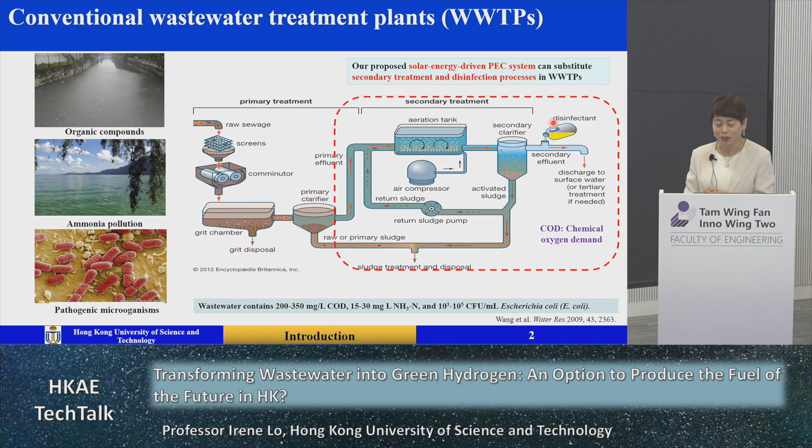Now, for this kind of treatment, although we have used it for so many years, it still has many limitations—at least these three limitations have been reported elsewhere. The first one is the presence of pharmaceutical and personal care products, in short form we say PPCP.

You might not know that every day we often use antibiotics because medical doctors give prescriptions to buy antibiotics if you get sick. But then in our wastewater, we often find the presence of these antibiotics—we call them emergent pollutants—in certain concentrations. The conventional wastewater treatment is not designed to treat or remove these kinds of antibiotics, so they are often present in our treated wastewater without any removal.

The second problem is that wastewater treatment involves high carbon emission, because using conventional wastewater treatment we generate nitrous oxide, N2O, and also methane gas, which are greenhouse gases with global warming potential substantially larger than CO2. So we have to remove these greenhouse gases because nowadays we talk about low carbon emission processes and try to avoid any global warming issue.

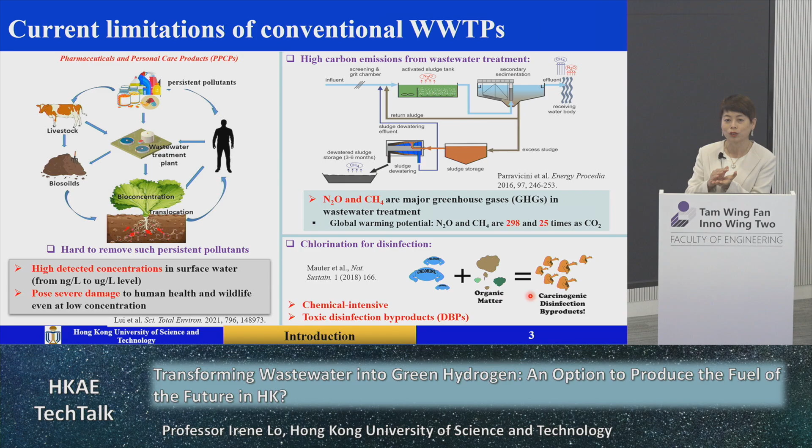The last limitation is that after we treat the wastewater, we use chlorination for disinfection. But chlorination often has problems because after we use chlorine to kill the bacteria, we might produce disinfection byproducts, which are cancer-causing substances. Although we don't see any obvious issue about causing cancer because we regulate the cancer-causing disinfection byproducts to a certain concentration before we discharge to the water body, adding chlorine is also a chemical-intensive process. So this is the current limitation.

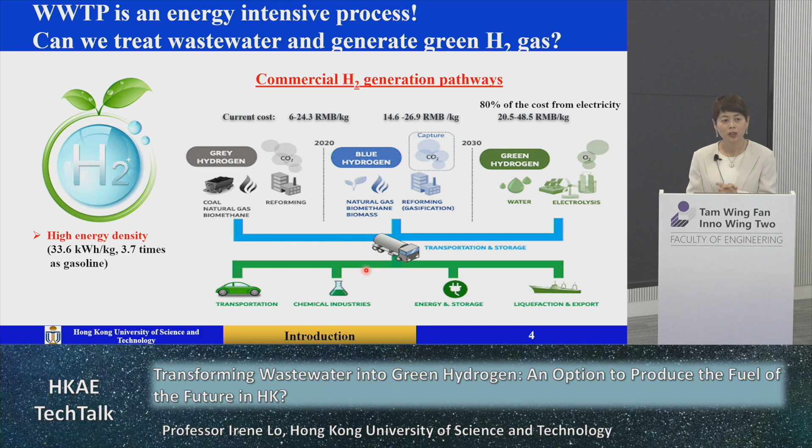Other than this, treating wastewater involves high intensity of energy—we need electricity, we need a lot of energy consumption. But can we ask ourselves, is there any technology where we can treat the wastewater to meet the standard as well as produce energy rather than use energy? Is it possible? That is the question we would like to explore today.

Among the hydrogen energy we want to produce, everybody wants green hydrogen because it is green and not generated from dirty fuel such as coal combustion. If we generate hydrogen from coal, we call this gray hydrogen. But if we use renewable energy to generate the hydrogen, then it is called green hydrogen. However, generating green hydrogen nowadays is expensive—although it is good, nobody really produces this kind of hydrogen because it's expensive.

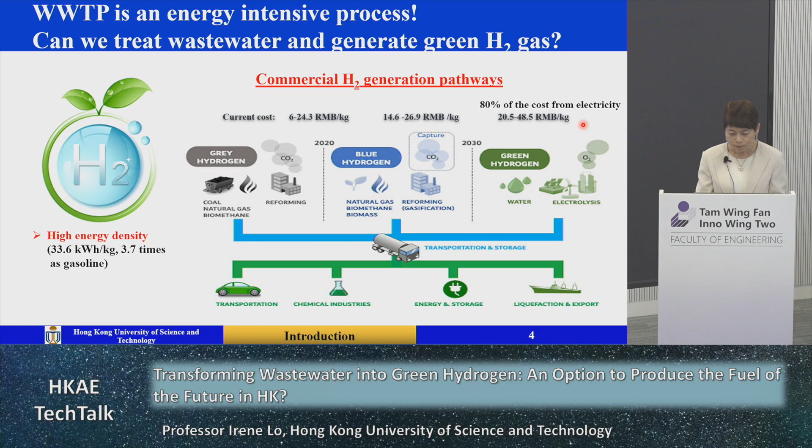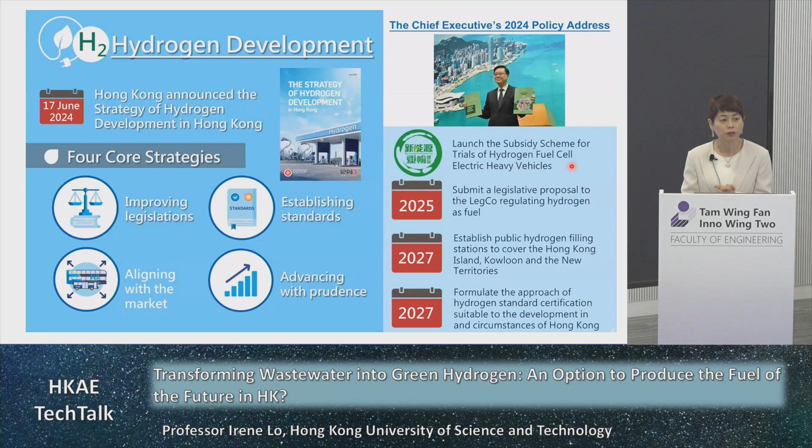In Hong Kong, the government actually has a plan to develop hydrogen. Last year, in 2024, they already had this development plan with 4 core strategies, such as how to improve the legislation for the use of hydrogen, how to set up the standard for hydrogen production. Also, our chief executive, during his policy address last year, particularly mentioned the launch of a subsidy scheme for hydrogen fuel cells for electric heavy vehicles. And there's a roadmap for the development and use of hydrogen in the coming years.

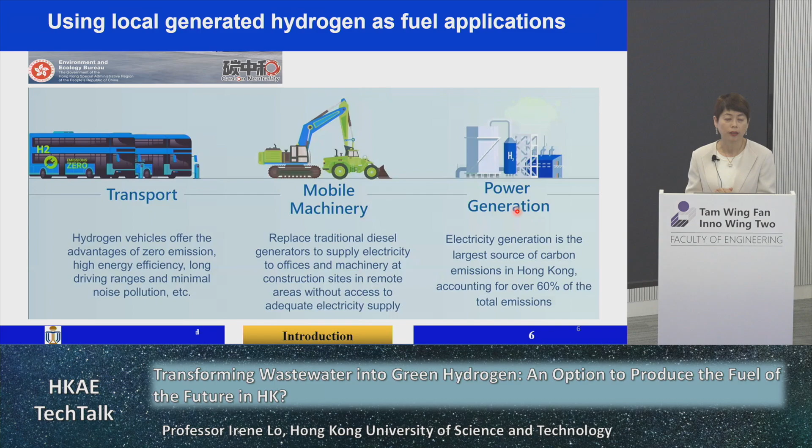You might ask, once we produce and generate hydrogen, in what way can we use it? In Hong Kong, hydrogen can be used for transport with hydrogen vehicles. Hydrogen can also be used for mobile machinery to replace diesel fuel, because diesel is a high carbon emission, dirty fuel. And hydrogen can be turned into electricity for power supply. So there's a number of applications we can consider when we have hydrogen produced locally.

So then the question is, we need to find an innovative technology which can treat our wastewater to meet the treatment standard in Hong Kong, and at the same time produce hydrogen. Among many technologies we considered, we finally decided on the use of PEC, which is a photoelectrochemical process.

In our research group, we have rich experience doing the PEC, or photocatalysis, process over the last 15 years. Every time, we publish a paper using PEC to remove or degrade organic compounds, so for a single function. We also developed materials used for PEC or photocatalysis, such as titanium dioxide in different forms, to inactivate bacteria or kill bacteria. And also we use PEC in another way, to oxidize ammonia nitrogen to nitrogen, to avoid generation of nitrous oxide, which is a greenhouse gas.

And also we know that water splitting can produce hydrogen, so our research group has done this kind of research. Now the difficulty is that we need to find common materials used as photoanode in the PEC technology which can do all these things: remove organic pollutants, inactivate bacteria, remove ammonia nitrogen, and generate hydrogen. Is there any single material that can do so many things together? That is the ultimate objective.

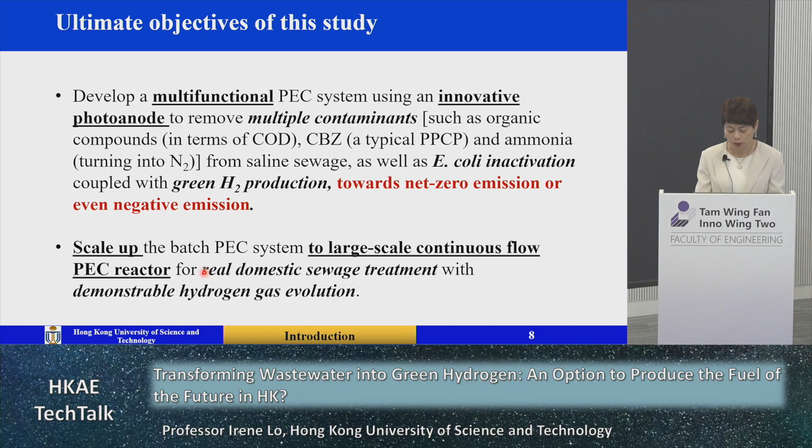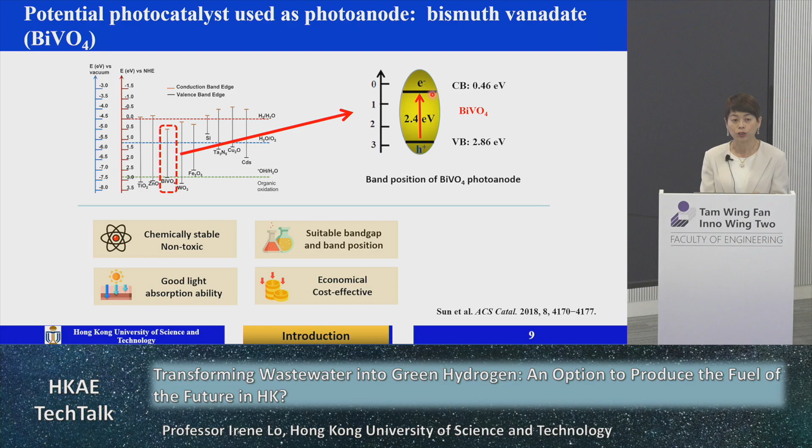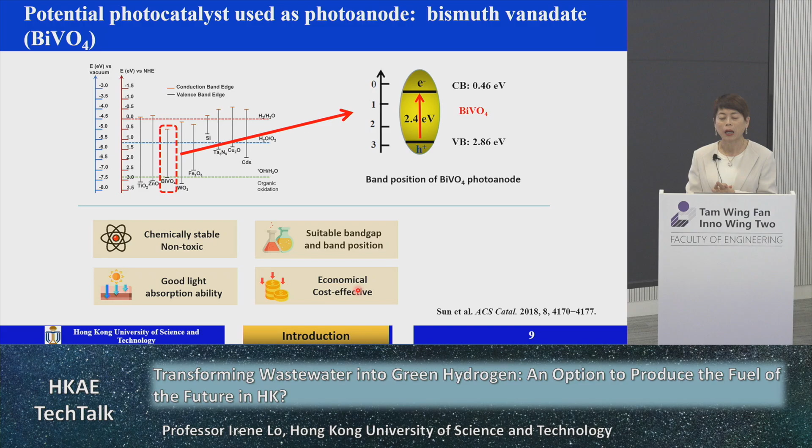Bismuth vanadate was chosen as a starting point for the research because it has several good things. It is chemically stable, a non-toxic material, and it has a very suitable band gap and band position. Band gap means the material has a very good valence band and conduction band, so it might be able to degrade and treat pollutants and also produce hydrogen. It also has a very good capacity to absorb sunlight, and the material itself is economical and cost-effective. So with this background, we think we can start with this material for investigation.

But we know we cannot just use bismuth vanadate directly because it still has some problems. Once it absorbs sunlight, the electron gets excited, but the bad thing is that it more easily goes back to the valence band—we call this charge recombination. Another drawback of this material is that its surface reactivity is not that high.

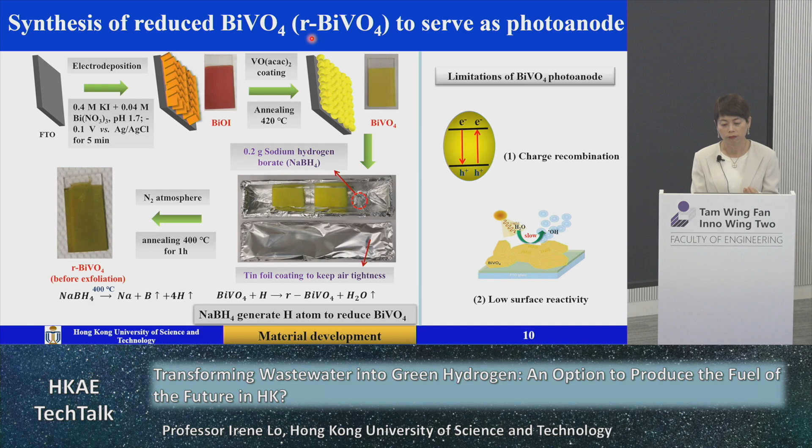So if we want to use this material, we have to do some modification to ensure the charge recombination can be prevented, and also make the surface more reactive than before. This is the modification process to make this bismuth vanadate more reactive. We call this reduced bismuth vanadate, and then use that as the photoanode.

After modification, we check whether the reactivity is stronger than before using XPS spectrum. You can see the V4+ before and after modification, and we have more V4+, meaning the reactivity increases. For the oxygen vacancies, before modification shown in green color, after modification the oxygen vacancies increase, meaning more percentage of oxygen vacancies corresponds to more percentage of V4+.

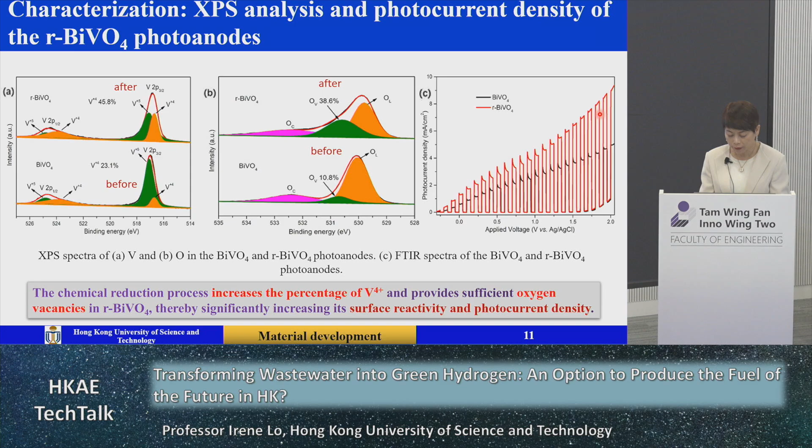More importantly, the more direct result is that we measure the photocurrent, the electron transfer. Without the modification, it's this line in black color. After modification, it becomes the red color, showing higher current flowing through this material. So we think this modification might work, and we can test it.

So then we use the batch study for the photoelectrochemical process. The idea is that we use sunlight to be captured by the photoanode to do the reaction. To mimic the sunlight, we have the solar light simulator. We can adjust the light intensity to mimic daily sunlight intensity, strong and low, depending on the weather. And then we have the reactor, called the photoelectrochemical reactor.

You can see this reactor. We have our material serving as photoanode, and then the cathode, which is the platinum electrode, and the reference electrode. In this reactor we have the water sample, and we take samples from time to time to see the change of the pollutant. We also have the gas sample to see whether we have hydrogen generated.

So we start with this batch study, and do two controls for comparison. For PEC, we have the light illumination, applying light to mimic sunlight, and also applying voltage. Then we have EC, the electrocatalytic process, just the voltage applied without sunlight. And we have the photocatalytic process, just the sunlight without voltage. This allows us to do direct comparison, and then we take water sample and gas sample after treatment.

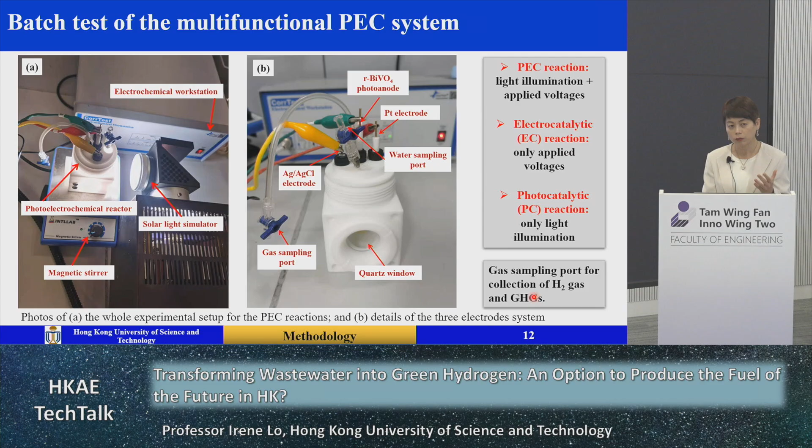So this is our finding. Now, as I said at the beginning, we don't use the real wastewater collected in Hong Kong. We just use simulated water, because we're trying to prepare wastewater that mimics the local wastewater.

Based on the local wastewater, the simulated wastewater has CBZ, which is a PPCP, a kind of emergent pollutant. We also have the equivalent of 300 milligram per liter COD, and 30 milligram per liter ammonia. The bacteria is in terms of CFU, 10 to the power 5 bacteria per mil of wastewater, and the pH of the wastewater is around 7. So we use this kind of simulated wastewater for study to see if it works or not.

Bear in mind, I highlight in red color that in this wastewater we have high chloride concentration, 5,000 milligram per liter. You may ask how come it is so high, but do you know how high the chloride ion is in our Hong Kong wastewater? Very high, because we use seawater for toilet flushing. So our wastewater usually has chloride ion over 5,000 milligram per liter, sometimes 7,000, sometimes 8,000, and occasionally we might have 10,000. So using 5,000 is actually the lowest concentration of chloride.

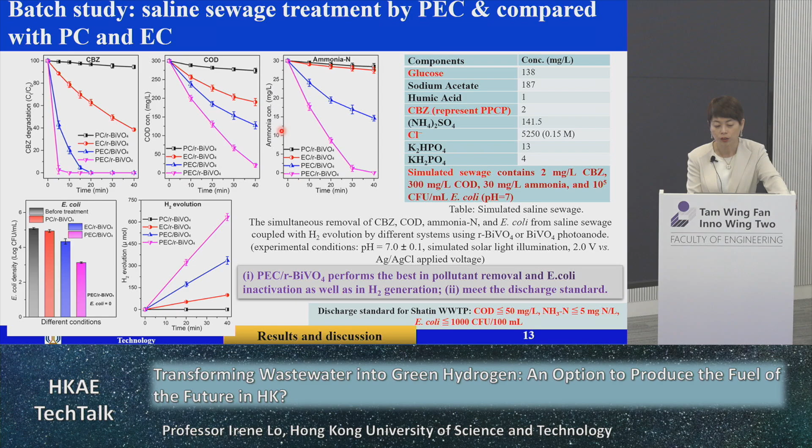Bear in mind that our zero point is slightly above that origin, because you can see the data point. In 5 minutes we can degrade all the CBZ. For the COD, in 40 minutes we can remove it to meet the treatment standard. For ammonia nitrogen, in 30 minutes we already meet the treatment standard.

For the E. coli disinfection, you don't see anything, it is zero because the bar is zero. So just in 5 minutes we can kill all the bacteria. So it's really, really effective.

For the hydrogen we want to generate, you can see that the pink line is our system, and the hydrogen generates as the reaction goes on. So by this kind of system, we can see that we have no problem to meet the treatment standard for the

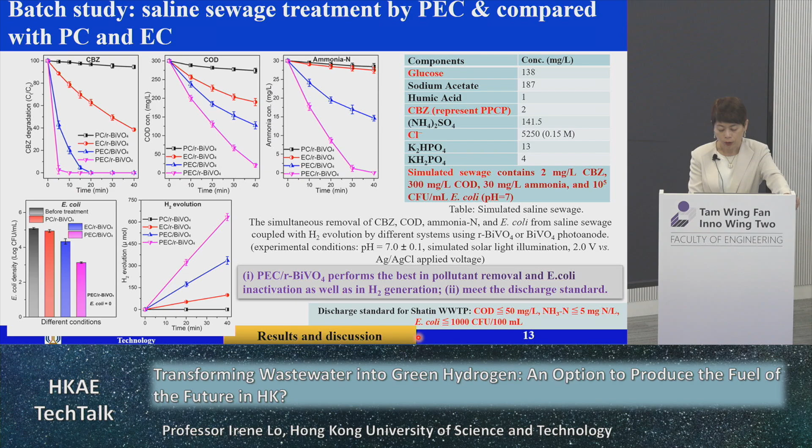Shatin wastewater treatment plant. So then we can continue to see what is the mechanism, how come the reaction is so good, the finding is so good. So then we do some scientific study, and we conduct the scavenger tests to find out what are the reactive species involved in this treatment system.

So basically, it is the photogenerated hole to degrade these pollutants. And then for the hydrogen evolution or generation, it is electron involved, because the water molecule picks up the electron and generates the hydrogen.

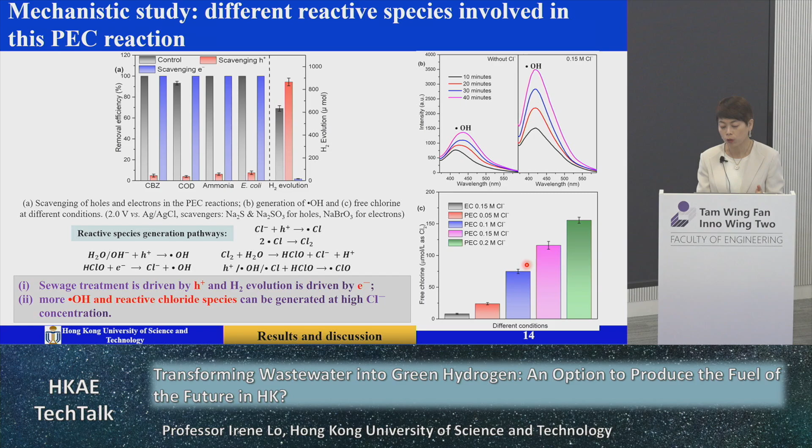Interestingly, when we have more and more chloride ion in the wastewater, as I said, our wastewater has a very high concentration of chloride. More chloride ions give us more hydroxyl radical, which is a very reactive species to oxidize the pollutant. Also, when we have more chloride ion in the wastewater, we have more free chlorine, that is chlorine residuals or chlorine species to react with the pollutants.

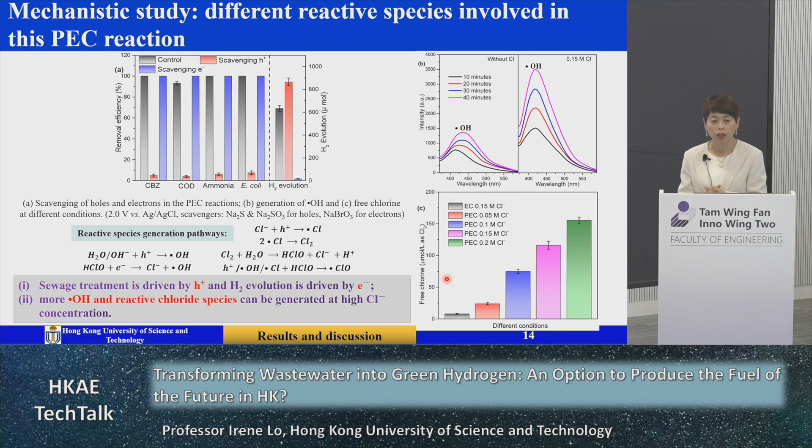So then we further tested what radicals are involved. To remove these pollutants and kill bacteria, we found out that it is the chlorine radicals that are the dominant species involved in the removal of the pollutants, followed by the oxychlorine radicals and hydroxyl radicals.

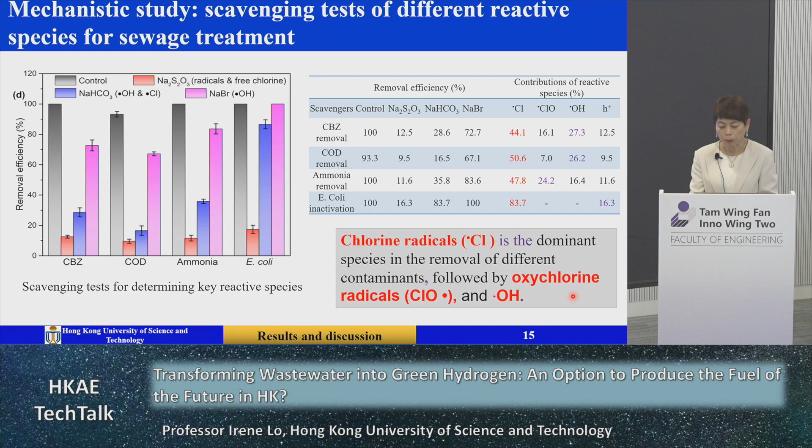So in summary, for the mechanism part, we truly understand what is going on for this treatment. For organic pollutants such as PPCP, COD, BOD removal, it is the chlorine residual and hydroxyl radical involved. For ammonia nitrogen, it is the residual chlorine, chlorine radicals, and also oxychlorine radicals involved. But it doesn't produce N2O, it mainly produces nitrogen gas, N2.

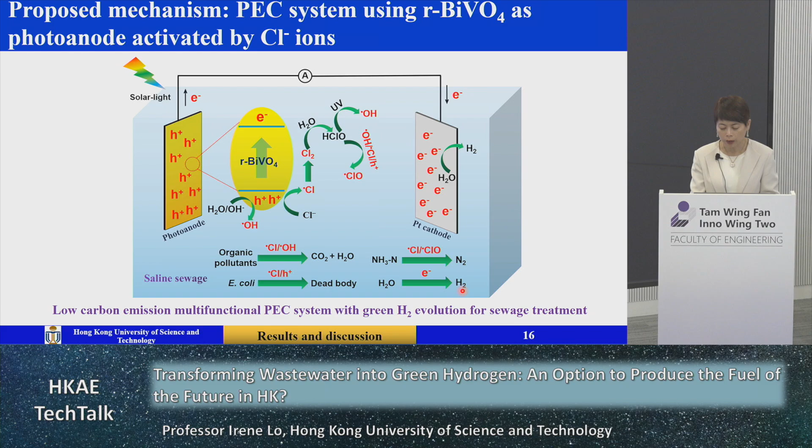For E. coli disinfection, in a short time we can kill all the bacteria. For the hydrogen generation, on the cathode we generate the hydrogen, and it is electron involved. So understanding the mechanism, we can apply the real wastewater to see whether it works rather than

the simulated water. So we collected 2 wastewaters from local treatment plants, one is Shatin, the other is Stonecutters. You can see the color is still different because in Shatin it is biological treatment, in Stonecutters it is chemical enhanced treatment.

So we measured the wastewater quality before treatment, and compared it with our simulated sewage used previously. You can see that for the chloride ions, Shatin has much higher chloride ion concentration than Stonecutters, and even higher than the concentration we used in the simulated sewage.

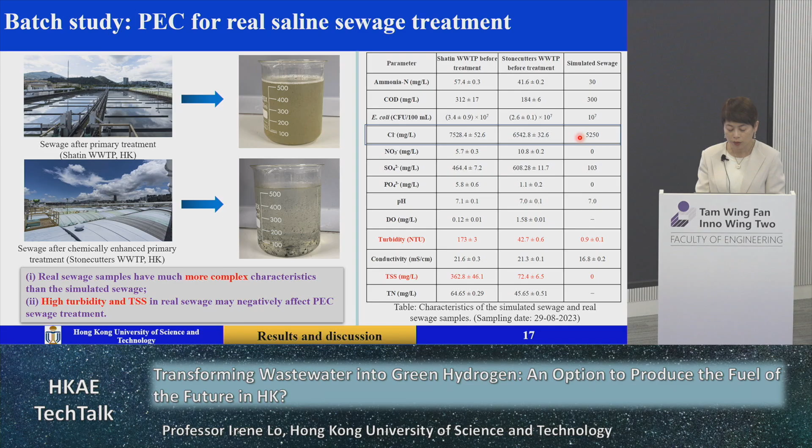So we tested this real wastewater, and after our PEC technology, you can see the picture. That is from Shatin, and after treatment it is very clear. This is from Stonecutters, after treatment you can see that the treated wastewater is much more transparent.

We measured all those parameters and concentrations, and we have no problem meeting the treatment standard. So we meet the discharge standard, and basically we can discharge to the water body without problem.

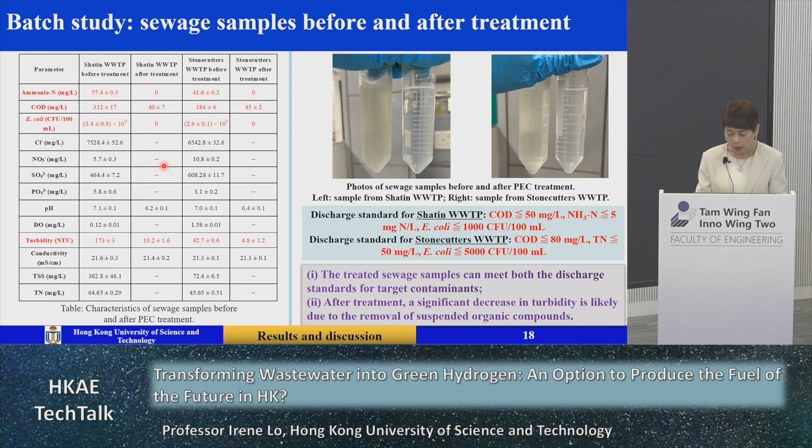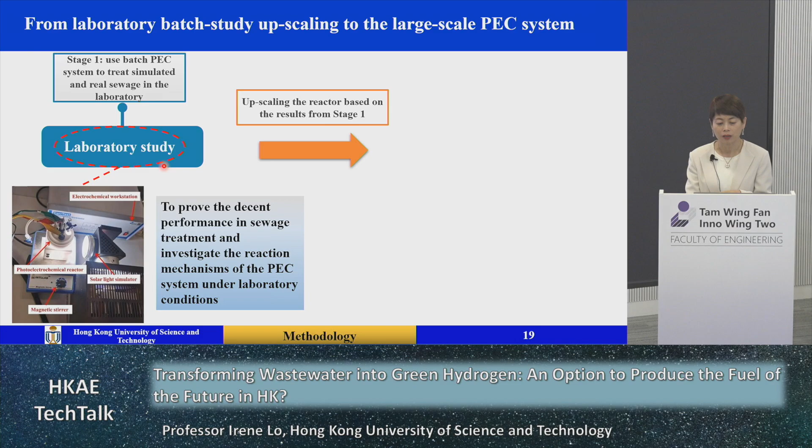So we are excited because so far the technology has been tested in the laboratory scale, small and in batch scale. So how can we turn it into real application for practical use? We have to think about upscaling the batch reactor into a large scale reactor.

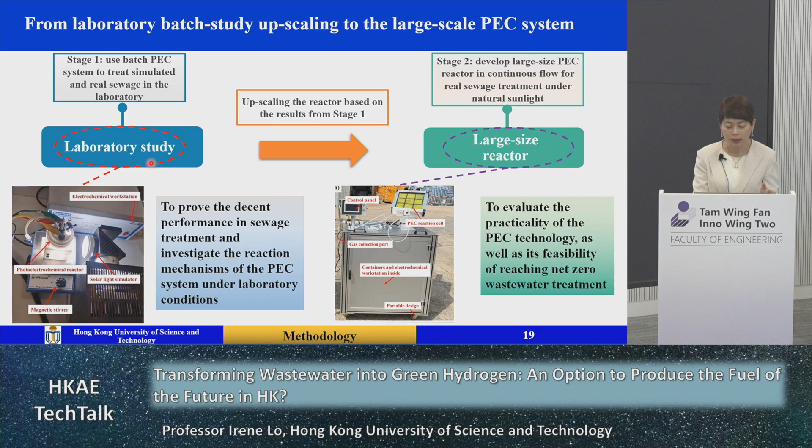Batch means that we just have a certain amount of wastewater to be treated, no inflow, no outflow. But for the continuous flow reactor, that is the large scale reactor, we have inflow and outflow continuously to treat the wastewater. It is a totally different scale, and we have to think how we can design the reactor, changing this kind of batch design into a continuous flow design.

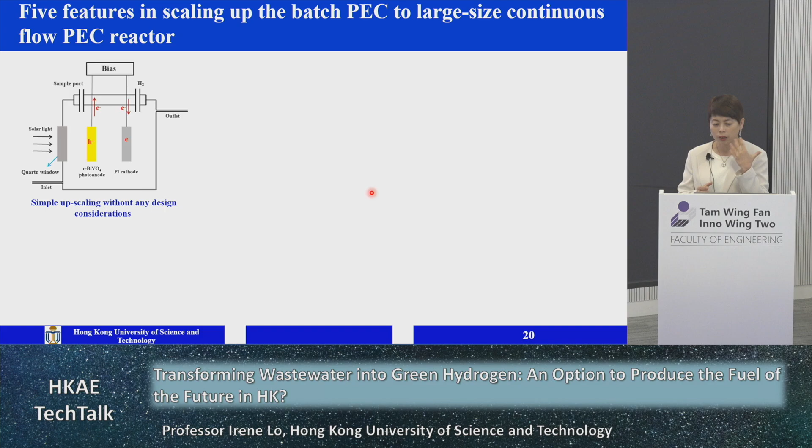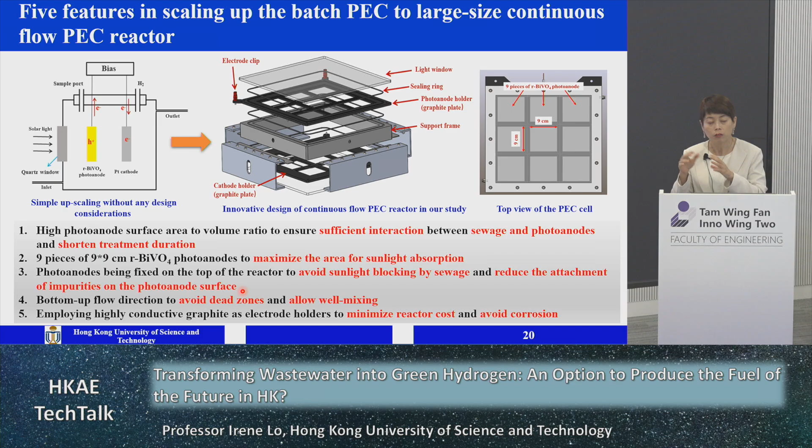We talked to different manufacturers and engineers and thought about the design and our criteria. The system should have sufficient contact point of the photoanode with the wastewater, and we have to maximize sunlight absorption since we use sunlight to do the reaction. We also need to make sure all the pollutants in the wastewater are well mixed without any dead zone. We decided on all these criteria, and then talked to the manufacturer.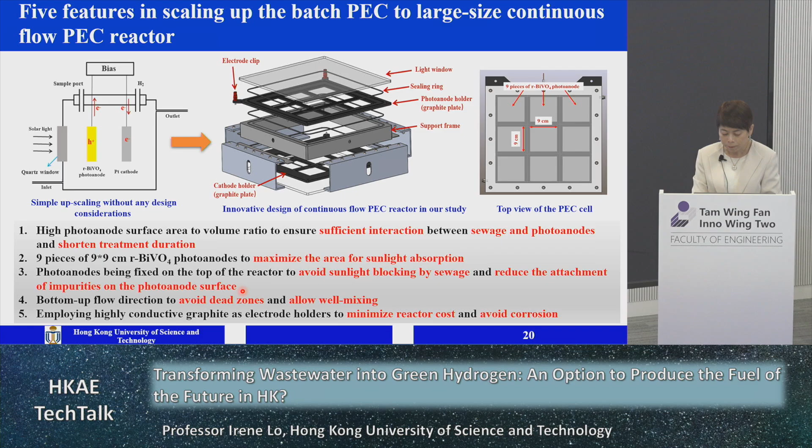At the end, we came up with this design, the continuous flow reactor. You can see there are different components. You can watch this video, which is only 2 minutes, to see how it works.

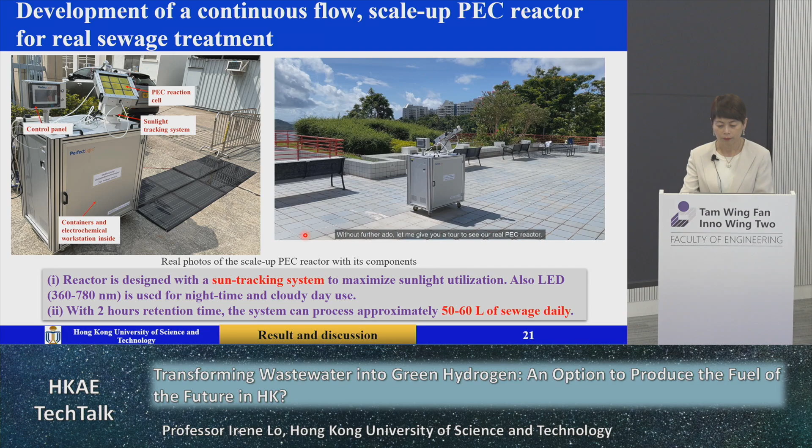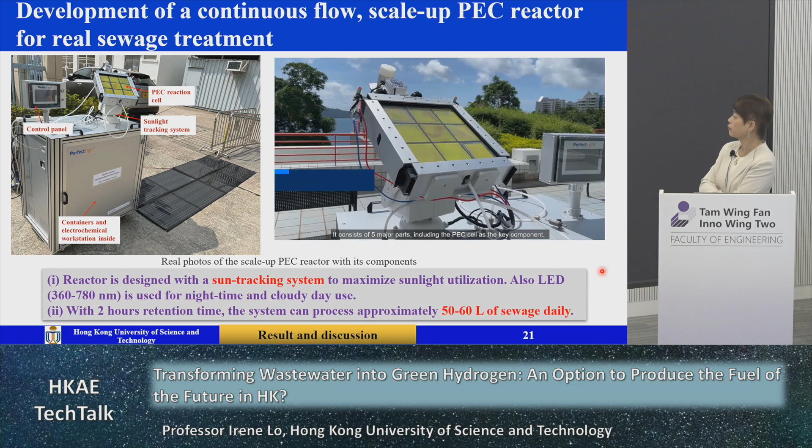Without further ado, let me give you a tour of our real PEC reactor. We dedicated our efforts to design this large-size PEC reactor. It consists of 5 major parts, including the PEC cell as the key component, the electrochemical workstation, pumps, influent and effluent tanks, and the control panel.

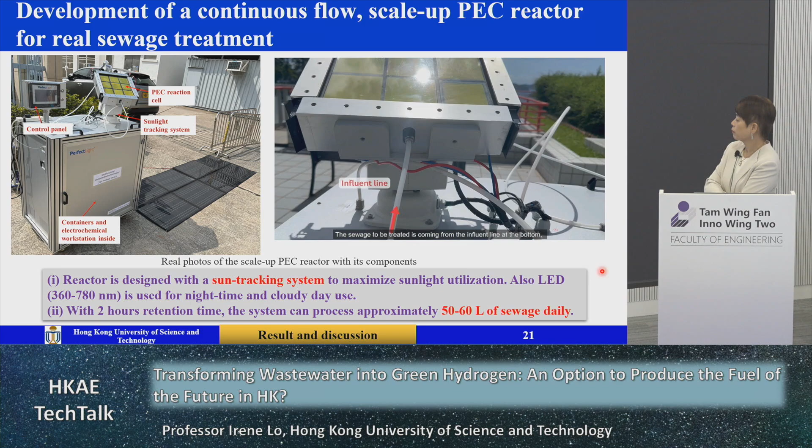Our PEC system is made out of 9 top-fixed photoanodes, which maximizes the surface area and sunlight absorption ability of the photoanodes. At the same time, 9 cathodes are placed at the back of the reactor. The sewage to be treated comes from the influent line at the bottom, while the effluent comes out from the top effluent line. This bottom-up flow design effectively prevents the formation of dead zones and ensures proper mixing in the reactor.

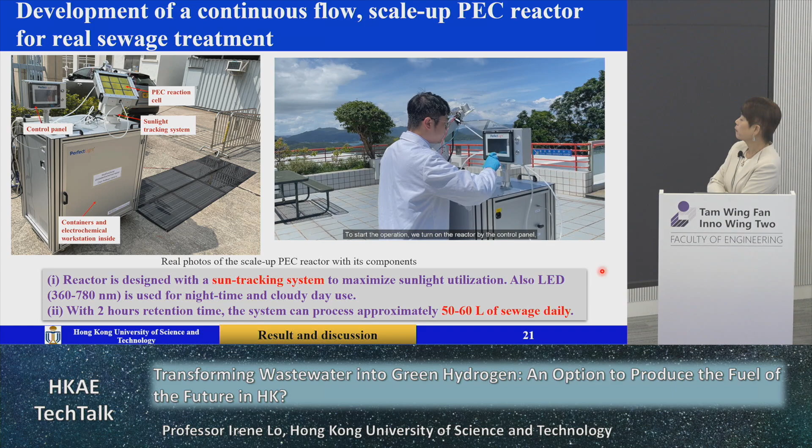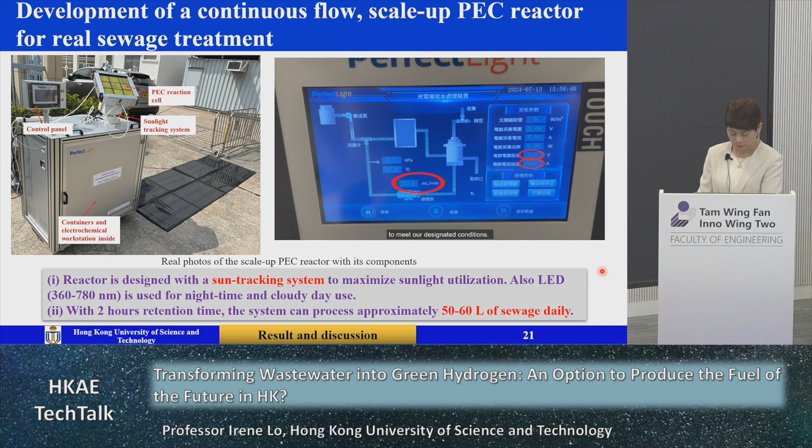To start the operation, we turn on the reactor by the control panel, and then we can conveniently adjust the applied current, voltage, and flow rate of the circulation pump to meet our designated conditions. At regular intervals, we take effluent samples from the reactor and monitor the concentrations of various pollutants, such as ammonia-nitrogen, chemical oxygen demand, and bacteria.

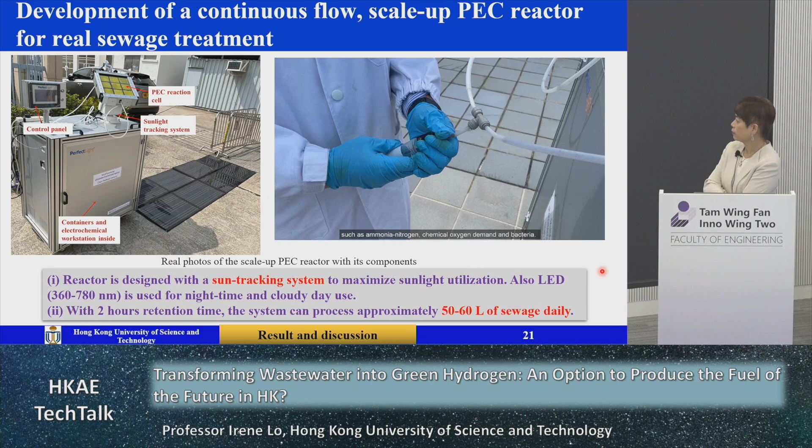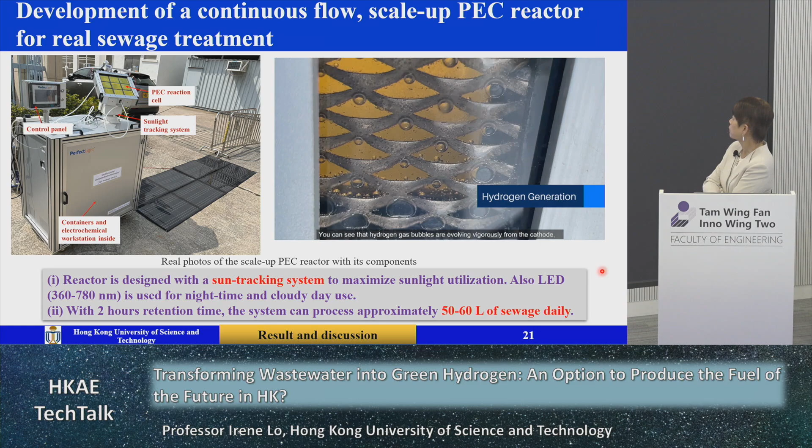Other than wastewater treatment, our PEC system can also generate green hydrogen as fuel. You can see hydrogen gas bubbles evolving vigorously from the cathode, which enter the effluent tank along with the treated effluents. To detect the hydrogen and greenhouse gas generation in the PEC system, we are also collecting gas samples regularly.

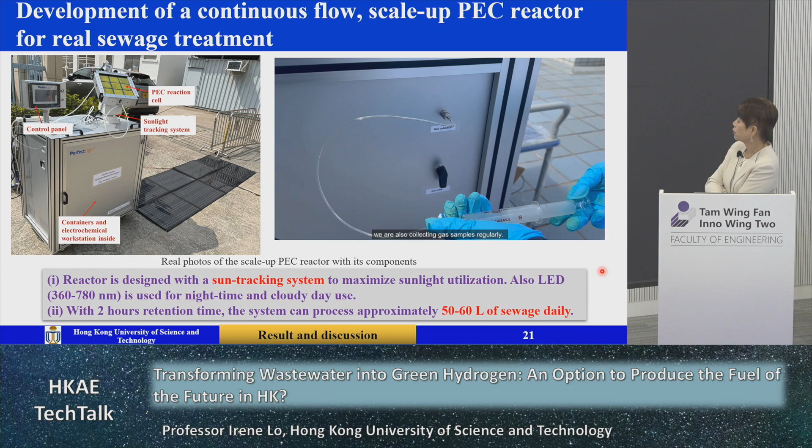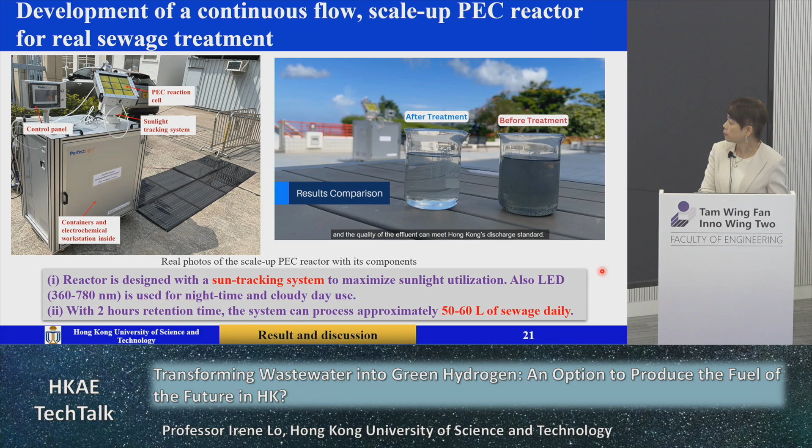Here you can see a direct comparison between the raw sewage and treated effluent. The water has become significantly clearer after the PEC treatment, and the quality of the effluent can meet Hong Kong's discharge standards. To reach round-the-clock operation, LED lamps could be equipped to the reactor as a supplementary light source to provide sufficient light intensity for the PEC reaction during nighttime.

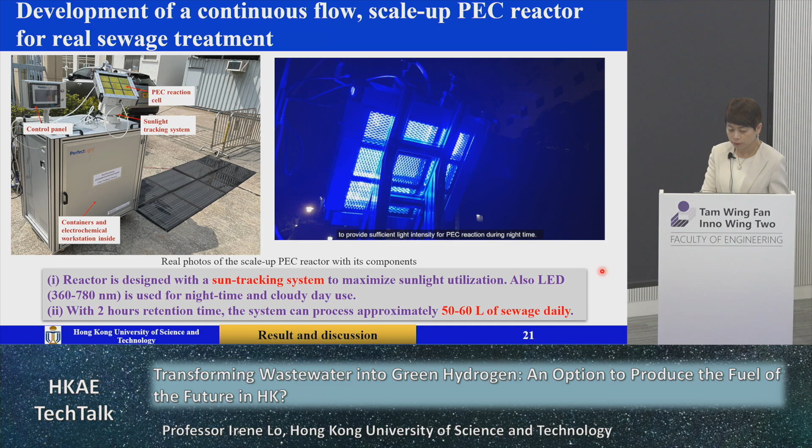So here is our reactor, and bear in mind this reactor has the lamp built in. In daytime, we use sunlight to treat wastewater. In nighttime, we have the LED lamp, which can be supported by our solar panel or just using electricity.

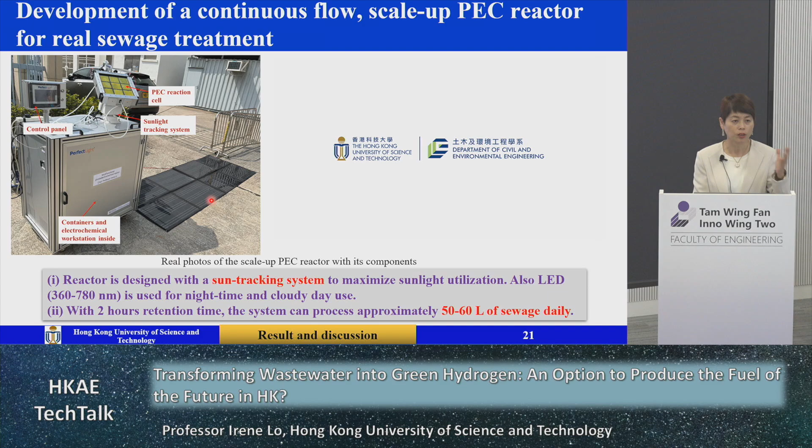So here is the result. Again, without any problems, we can treat the COD to meet the treatment standard. We can remove ammonia nitrogen to nitrogen. We can kill the bacteria in a short time, with 2 hours retention time. And hydrogen generation increases over the time we treat the wastewater.

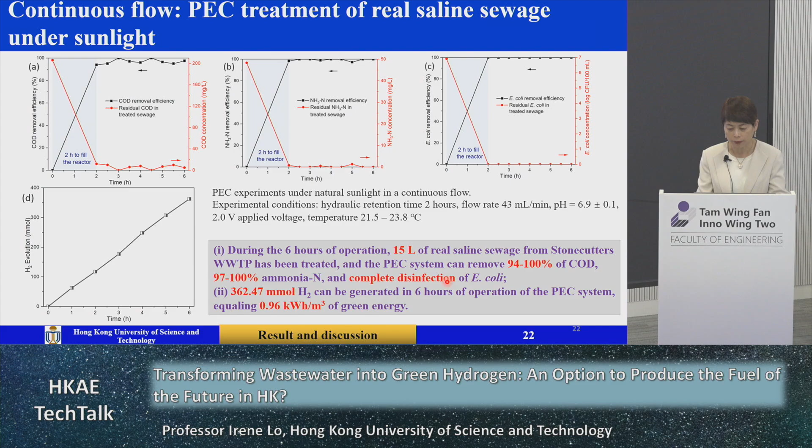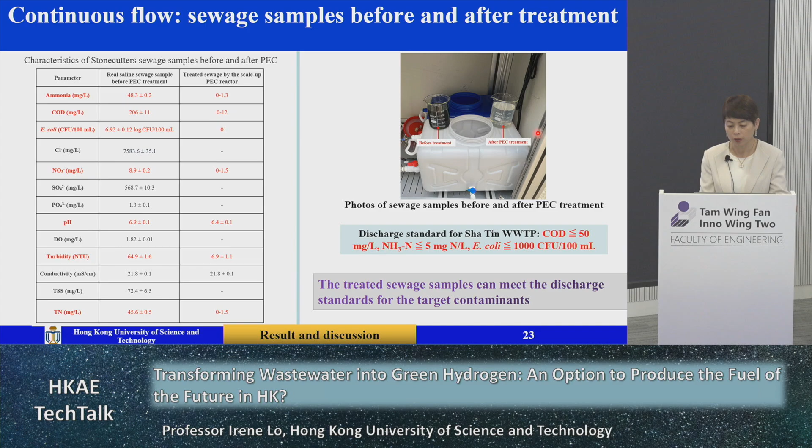On average, every cubic meter of wastewater we treat can produce almost close to 1 kilowatt hour of electricity. We have no problem killing the bacteria to meet the treatment standard. Using the real wastewater we collected from Stonecutters, after treatment we can meet all these parameter standards, and this is the color before and after treatment.

Not only this, we made sure that wastewater might have some fluctuation from time to time. So over the last years, we collected different samples at different time periods: May 2024, October 2024, April 2025, May 2025. So the wastewater does have some fluctuation.

For example, the COD variation might be around 18%, ammonia nitrogen varies 31%, and total suspended solid 48%. So although the wastewater is not always stable, it has some variation. But in terms of the treatment after our PEC degradation, we can still meet the treatment standard.

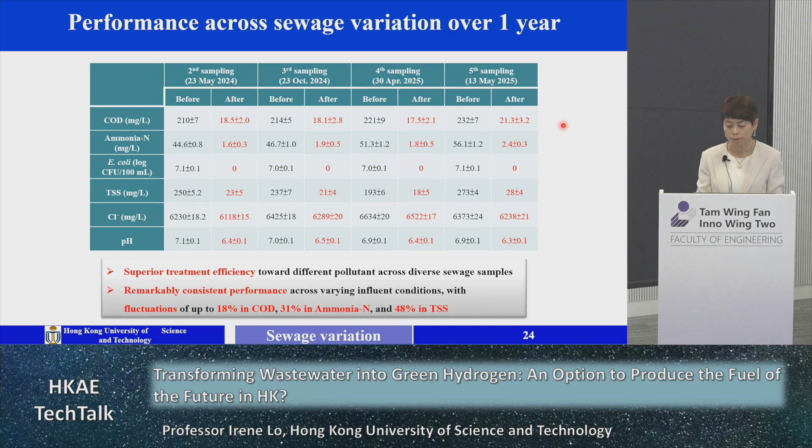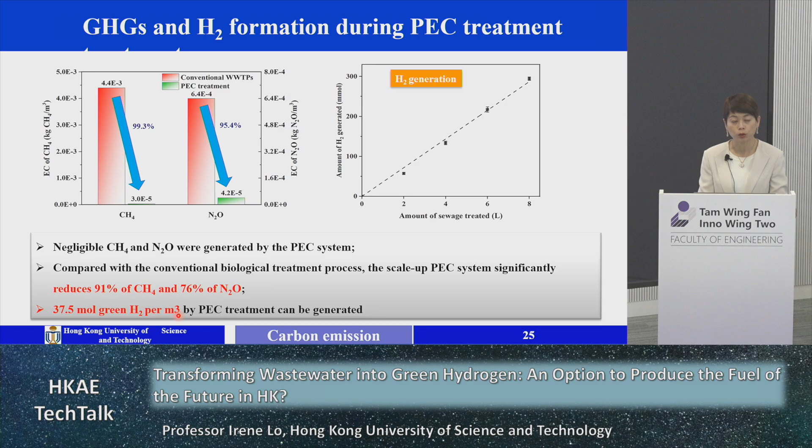And for the hydrogen we generate, for every liter of wastewater we treated, in total there is a substantial reduction of ammonia, methane gas and N2O, and also we produce a substantial amount of hydrogen gas.

In terms of greenhouse gases, we consider two scenarios. If we don't use a solar panel for nighttime use to support the LED lamp, assuming daytime we use solar light and nighttime we have the lamp to support the reaction, then compared with conventional wastewater, we have scope 1, scope 2, and total, which is the summation of scope 1 and scope 2 and offset. The total emission from conventional treatment is much higher than our total emission from our technology. We can claim it is nearly a net zero process.

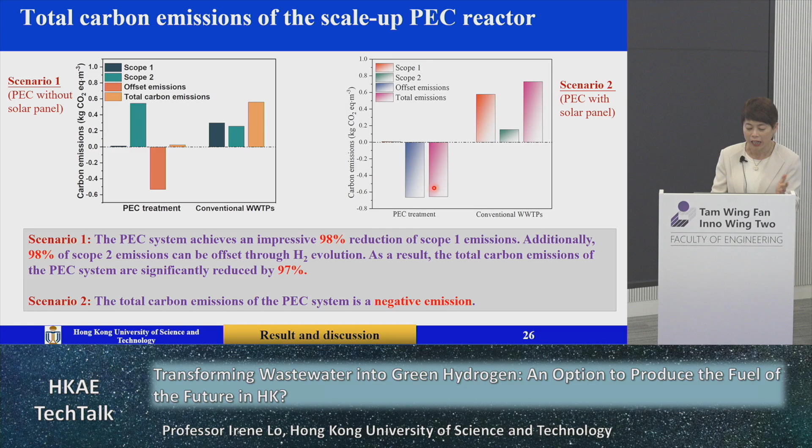But if we really consider using the solar panel to support the LED lamp at nighttime, then the total emission is negative, because we produce hydrogen, which is positive energy that can offset the carbon emission. So if we consider using the solar panel, the total emission will be even negative, meaning we can sell the carbon reduction for carbon trading.

I use this data to illustrate the socio-economic value of our technology, assuming we use it for the Stonecutters Island treatment plant, which treats 1.4 million cubic meters per day. Assuming for carbon trading every ton of carbon emission reduced can be traded for $160 US, and assuming we can turn the hydrogen into electricity with about 30% efficiency.

So then every mole of hydrogen we can generate a certain kilowatt hour. You can see that every year we can reduce 300,000 tons of carbon for Hong Kong. This is important because Hong Kong, just from wastewater treatment, produces 3% of the total carbon emission already.

We can use the negative carbon emission to generate money for carbon offsetting or carbon trading. And using the hydrogen to generate electricity, it will be able to support 100,000 households.

If you remember, for the incineration plant we will have at the end of this year or early next year, 3,000 tons of solid waste burning will generate energy, and the total energy produced will be sufficient to support 100,000 households—exactly the same as this technology applied for the Stonecutter wastewater treatment. Again, we can produce the same electricity.

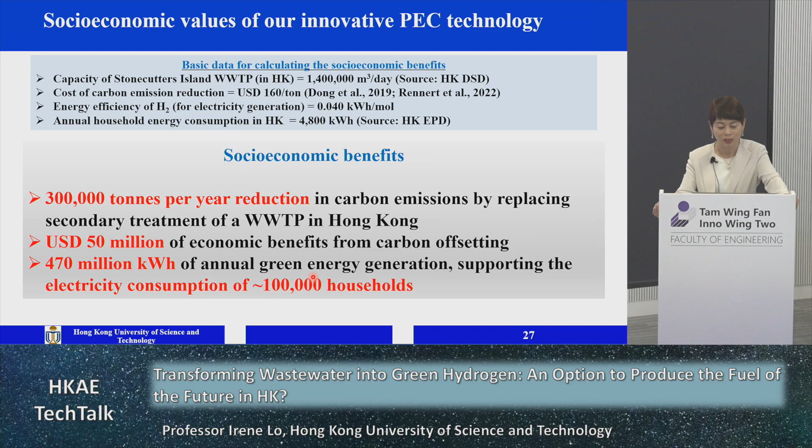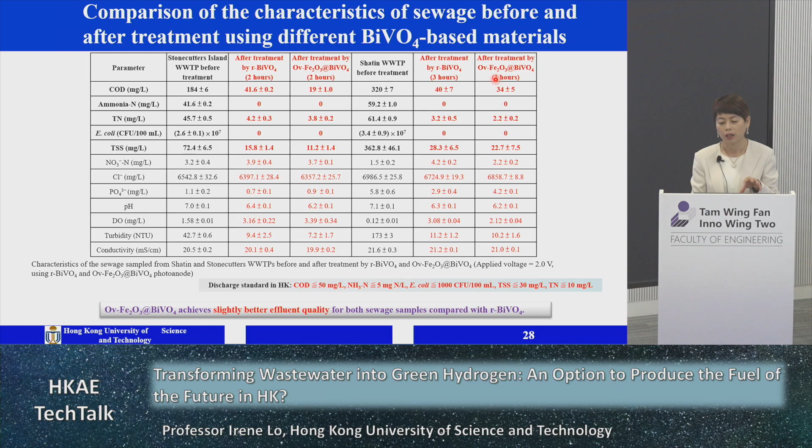Other than the original form of reduced bismuth vanadate, our research group keeps improving this material. We further revised it into oxygen vacancy, iron oxide bismuth vanadate, and the performance is even better and faster. This data shows how good this new material is. We keep improving the performance and lifespan of this material so we can use it for a longer time.

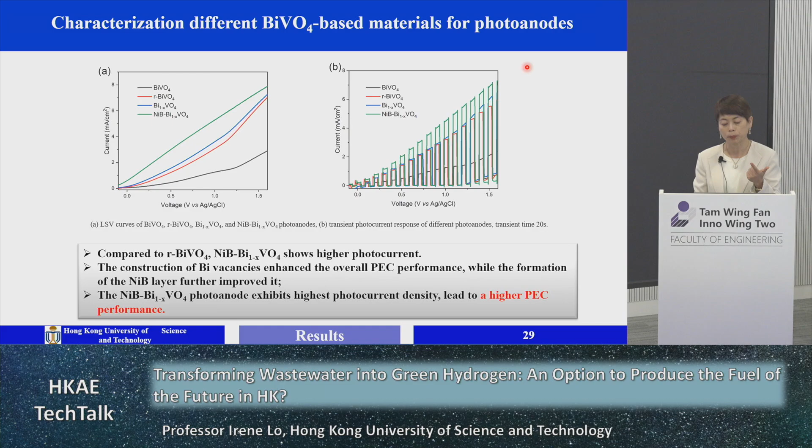So finally, here is the summary. We developed this multifunctional PEC system. I can say it kills five birds with one stone. The first is complying with the treatment discharge standard in Hong Kong. The second is that we use solar light to remove pollutants through the PEC system and reduce greenhouse gases. The third is that we use solar light to turn it into hydrogen fuel.

For wastewater, conventional treatment cannot remove antibiotics like PPCPs, but our system can—that's a bonus. And the last one is that our system can kill bacteria as well. We don't need to add chlorine for disinfection, no chemical addition is needed, and there's no worry about the formation of disinfection byproducts, which are cancer-causing materials.